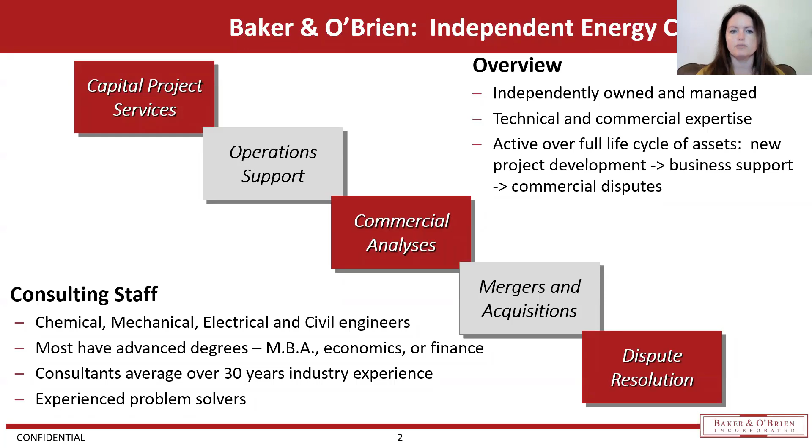So next slide, Luis. As we mentioned, we're going to cover the upstream, midstream, and downstream sector. The upstream sector is exploration and production, so that would be getting the crude oil and natural gas out of the ground. Luis will be covering a lot more on the specifics of that area. Then we'll move to midstream, where we'll cover the transportation, storage, and processing. This would be getting that oil and gas to the next point along the value chain, whether that be a refinery or a processing station, or even a retail center for gasoline and diesel. And then finally, we'll move into the downstream that Tim will cover, where we'll cover refineries as well as petrochemical facilities, so we can kind of end up at that plastic bag according to our title.

So first, a couple of fundamentals. Next slide, Luis. Oil and gas obviously comes from way down deep under the ground. It's made from decomposing organic waste, and this takes 300 or 400 million years to form oil and gas. As that organic waste was buried way under the ground, mud gets on top of it, you get a lot of heat and pressure, it decomposes that organic waste, turns it into oil and gas. And that gets us to present time where you have an oil rig drilling down into the ground, or even maybe sideways into the ground, to start recovering some of that oil and gas. Typically where you find oil and gas, you're also going to find water, so you'll see the three phases there of different materials. Next slide, Luis.

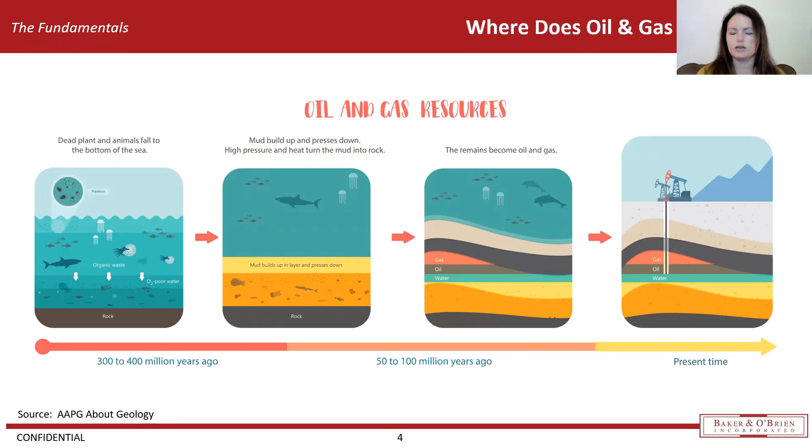A couple things that are important to remember is that not all oil is the same. People think about the oil industry, but the oil itself comes with a variety of different quality components to it. Within oil, you'll have a variety of different compounds such as methane, ethane, propane, and don't worry, we're not going to quiz you on any of those compounds.

Within crude oil, you'll have a variety of densities and viscosities. So that's where you get into the names of light crude versus heavy crude. Every crude oil has some sulfur in it, and that amount of sulfur can give you the name sweet crude or sour crude.

If you think about the US, a lot of what has happened over the last decade has been an increase in the production of light tight oil or shale oil. That type of crude is generally light crude that is sweet, so light sweet crude oil. A lot of what we've heard about up in Canada with the increased production up there is actually a heavy sour crude oil, and that's just how they're termed.

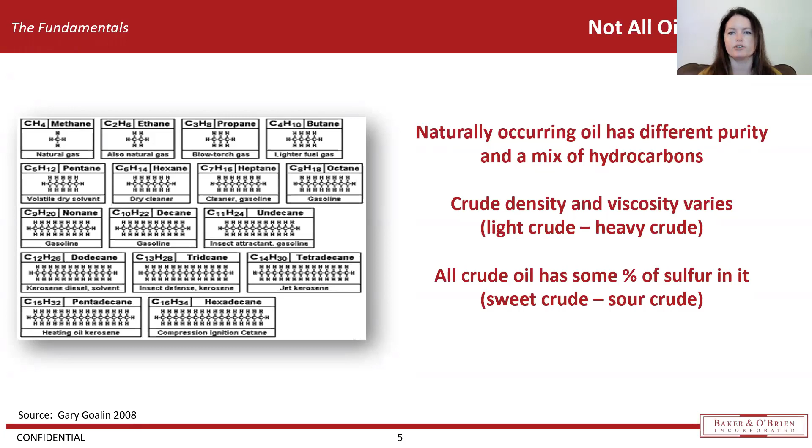The next slide will cover gas. Similar to oil, not all the same. Lean gas would be mostly methane with some ethane, propane, and butanes and heavier. And then rich gas would be again mostly methane, but it'll have a higher component of those NGLs, which are the ethane, propane, butanes, and heavier.

These are just important things to remember as you're learning about oil and gas, so you understand when somebody says, I'm producing light sweet crude oil, it means it's a light crude that is low in sulfur, or I'm producing a rich gas, which means I have a higher component of NGLs within my natural gas stream. Next slide. All right, I'm going to pass it over to Luis.

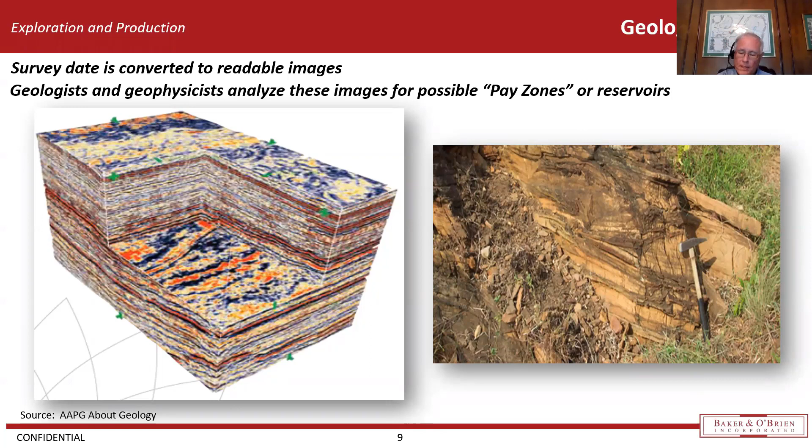Also, you can perform what is called geophysical or seismic surveys. You can do it on land or on the seabed. On land, seismic survey is produced by a human-generated wave that is sent through the earth using a thumper truck. The more energy in the wave, the farther it's going to go before it starts dissipating.

Several things could happen here depending on the properties of the rock. The wave can either pass through, be reflected, or some combination of the two. Then when the wave gets back, it gets collected by devices called geophones. The geophones measure the time since the wave was sent until it got back, and also the strength of that wave coming back.

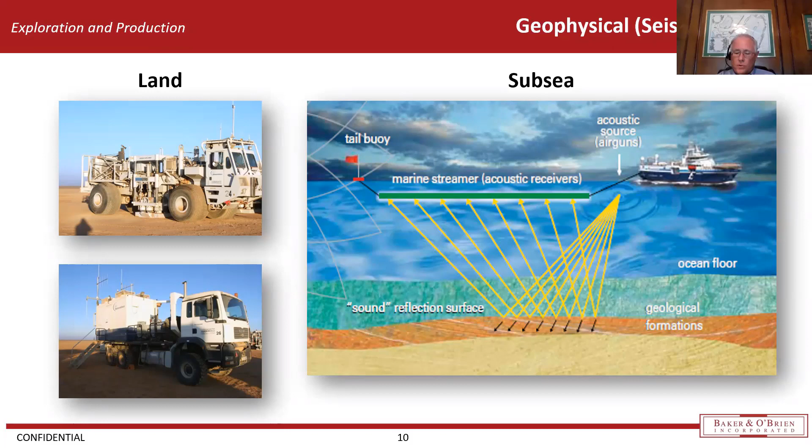The same happens with subsea, with the difference that you use sound waves to map the geological structures under the seabed. These sound waves travel through the water and can penetrate up to 6,000 meters below sea level. When the sound waves come back, they are recorded in devices called hydrophones, as compared to the ones used for land, which are geophones.

Once all this geological surface has been studied and well understood, a decision is made that we are going to test a well, that we are going to drill. But before you do that, you need to have the right permits. In most countries of the world, all mineral resources belong to the government—the rocks, the minerals, and of course the oil and gas.

If somebody, some entity, or corporation would like to extract those resources, they need to get permits from the governments where they found the minerals. In the US is one of the few places in the world where minerals can be owned by individuals or businesses. And if it belongs to the government, you can lease those minerals, those fields, for different ranges of depths and different durations, limitations, etc.

Another thing is the surface rights. Let's assume that somebody goes to your door on your property and says, I will pay you $100 million for the oil that is beneath your property. That would be great, right? However, you do not know how to extract it.

You do not have the capability, you do not have the resources, and it will cost a lot of money. So what you do is sell the rocks and the oil and gas in your property, but reserve your surface rights. Also, you can get compensation for ingressing or egressing the property, for the building of roads, the rights of way, and if there is damage to your property, you get compensated. So if you would like to sell it, you sell it, but you remain possession or maintain possession and control of the surface.

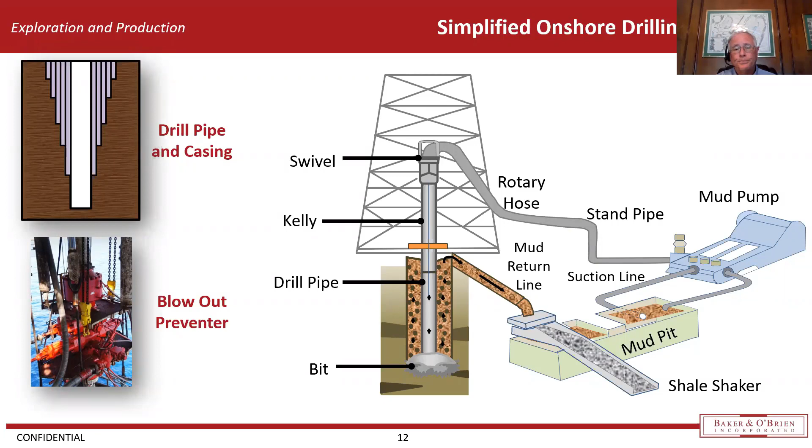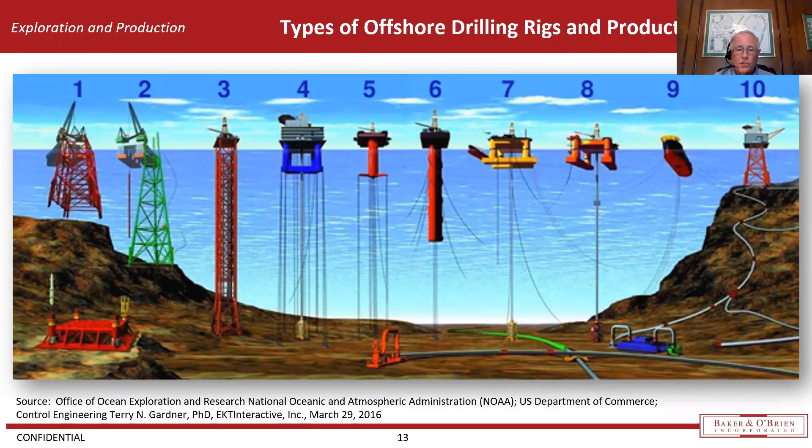Some people decided to go even deeper, up to 20,000 feet, and that's where you get the semi-subs, numbers 7 and 8. You also have the famous floating production, storage, and offloading tankers, number 9, which float, produce, store, and then move the oil back to the tankers. So a lot of good technical development in here.

So once the drilling continues, you have to make sure that whatever assumptions were made during the surveys are proved. That's what is called logging and testing.

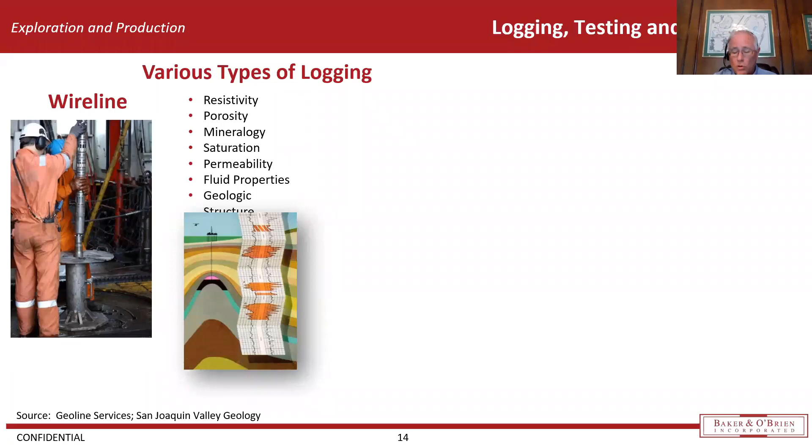Well logging is the practice of making a detailed record of the well. You throw a wire line through the drilling pipe with a lot of instruments and sensors, and you capture the resistivity, porosity, what the minerals are, the saturation, etc., in order to decide if you're going to continue drilling and if you're going to spend a lot of money putting together a production facility on top of that well.

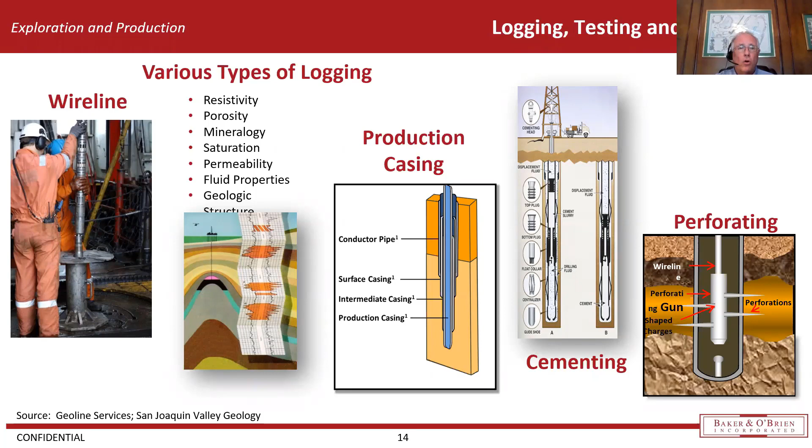That leads to well completion. I talked a little bit about production casing and cementing earlier, but then the last step is perforating, where you actually perforate the casing and the cement in order to allow the oil and gas to enter into the well stream.

The last step before production begins is the installation of the Christmas tree, that's what the industry calls it. It's a piece of equipment that provides basically flow control on an oil and gas well. When the oil has been decided to move into production, the BOP is removed and they place the Christmas tree. It's basically a vertical assembly of valves, with gauges, chokes, and it also allows you to inject chemicals while producing or extracting the oil.

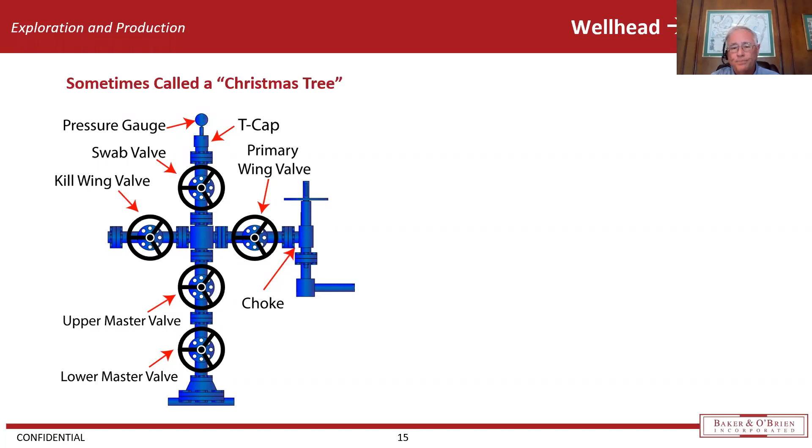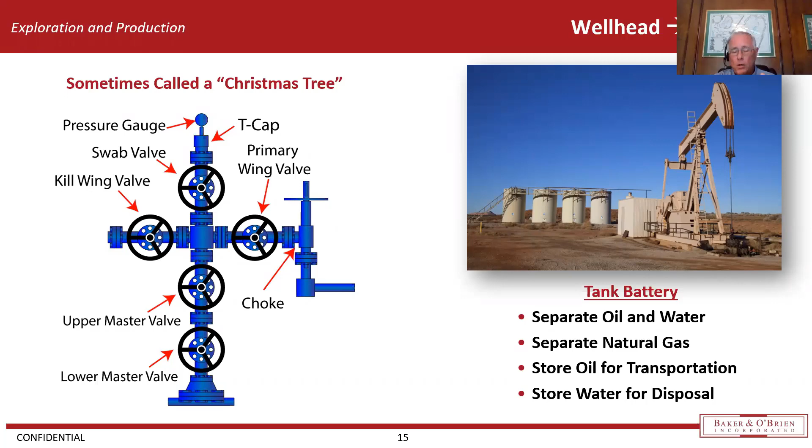When it comes to production, it looks like a very simple process, but itself is complicated. Basically what you do is separate the oil from the water and the gas. Each one will have its own stream, and then you either store the oil or transport it, and you do the same with the gas. You either compress the gas to send and transport it, and you either treat the water before disposal or store it and move it somewhere else.

This is an example of a production facility. In this case, once several wells have been decided to be exploited, what you see here is a typical shallow water production platform. On the left corner, the farthest to the left, is the drilling rig, which has several wells in it. The oil is then pumped back into the production platform, which is the one in the middle.

And then you have two other platforms which basically compress the gas that has been separated from the previous one, and it's transported through pipelines. You will also see on the top right side a living quarters platform, because people live in those platforms, in those facilities. So they need to have rooms and dining rooms and things to rest and distract themselves.

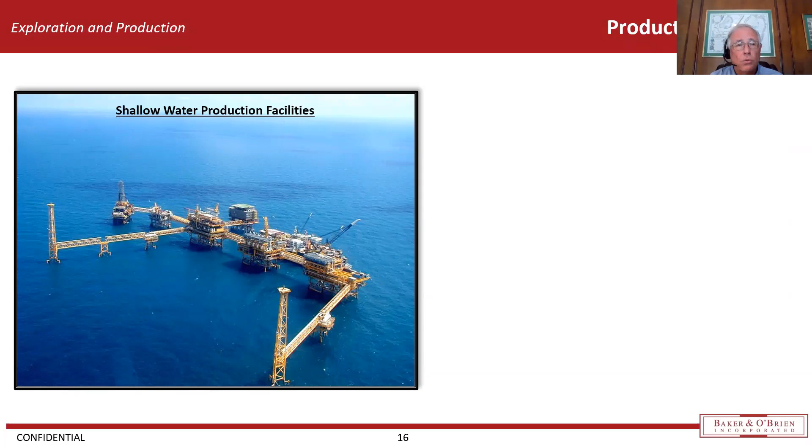In case of emergency, you will see those towers on the left. Those are flare towers. So what you do is, if you need to relieve the pressure, you open the valve and you just start flaring the gas.

On the other side of the spectrum, you have a subsea production system. This is in water depths of 8,000, 20,000 feet, as I was showing before. And you can see a subsea production system with an FPSO, which is connected to subsea wells. And then the oil and the gas flows back to the FPSO through what is called the flow lines.

The amazing thing with these types of facilities is that everything is performed remotely. Everything is controlled remotely. So all the power, the heat, the controls are through cables that are called umbilicals, and then it produces the oil, and then it goes back to the tanker.

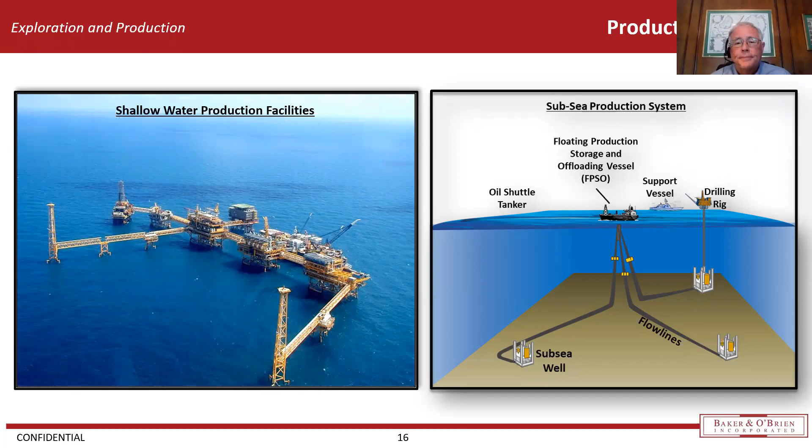Okay, thank you, Luis. So with this section, we're going to start the midstream. So now we have oil and gas coming up out of the surface to the wellhead. From here, we need to get that material to its next point in the value chain. So we're going to go through the midstream.

Next slide. So this slide takes you from the wellhead to the ultimate user on the right, which would be in green in the downstream sector. We're going to start on the left, and I'll just walk through the value chain, and then we'll get into a little bit more of the specifics of each of these types of assets in the next couple slides.

So starting on the left at the wellhead, first we'll start with natural gas. So whether you're producing crude oil or natural gas, you're going to have some assets that are very similar, like we're going to use pipelines, but the materials used to make those pipelines, the amount of pressure that they need to hold, and the facilities required after that can change. So let's start with natural gas.

With natural gas, since it is, as the name says, a gas, it has to be compressed and held within a pipeline. And so everything along the value chain is held very tightly. It can't be put onto, for example, a truck unless it's a specialized truck. It can't be put onto a tanker unless it's a specialized tanker. So you need to have all sorts of pressurized materials used in the transport of the natural gas.

From natural gas pipelines, you would go to a gas processing facility as one of your first steps. So the natural gas that comes out of the ground, a lot of times it has the natural gas component, and then it has natural gas liquids. It also comes with water and some other kind of unsavory actors that might be mixed in with the stream. So you go to that first step and you separate it out.

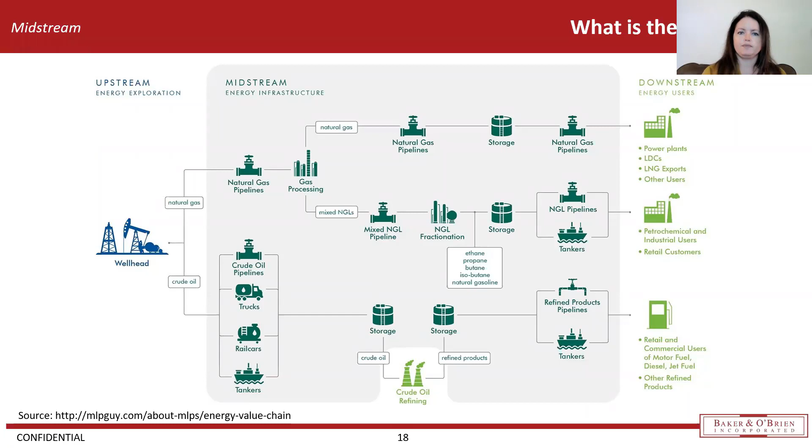Let's start with natural gas. I'll tell you a little bit more about each of those facilities we just quickly covered. Starting with pipelines, this would be the most common way to transport natural gas. Since it's a gas phase, you're actually going to start at the wellhead with a very small diameter pipeline. It'll go to a larger diameter pipeline as it gets into transmission, so you've picked up natural gas from a lot of different wellheads, brought it to a larger pipeline, and now you're going to put all that gas together and ship it to the next facility.

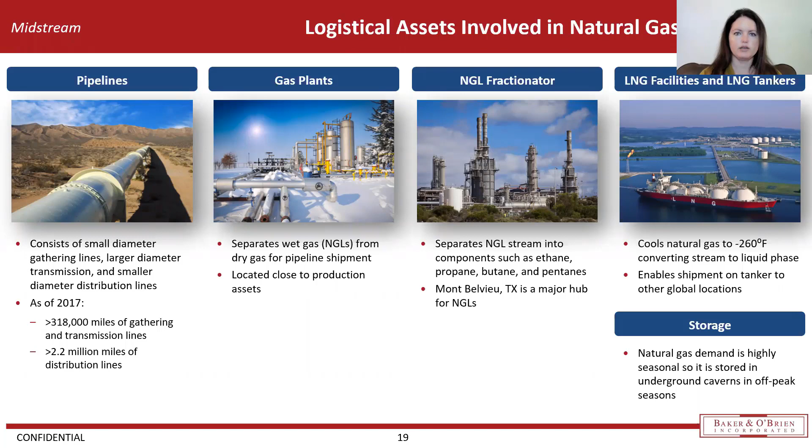All right, next slide. This one is very similar to the previous one, but it's on crude oil instead. So again, we'll start with pipelines. Again, that rare above ground pipeline that we're seeing in the picture here. Crude oil pipelines are also typically buried, so you would not see them just kind of hanging out anywhere. You'll have a similar structure where you have small diameter gathering lines that go to a large trunk line, and then they'll go to smaller lines as they connect off to refineries. In 2017, there were 79,000 miles of crude oil pipelines and 62,000 miles of product pipeline, quite a bit less than what we saw on the natural gas side.

And that's just because crude oil can be transported in a variety of different ways. It doesn't have to necessarily go into a pipeline. So it gives you a little bit of variety on that. And then it doesn't have the pressurized components that you need for natural gas.

Tankers and barges are used in crude oil and petroleum product transportation. This would either facilitate imports of crude oil or maybe exports of crude oil into and out of the US, since we're kind of focusing here. It would also facilitate movements of intermediate feedstocks. So like, let's say you've taken crude oil into a refinery and you've made something that's not quite finished. Another facility might need that stream. And so you can put it onto a barge or under a tanker and you can ship it off to another facility for further processing.

And then let's say you created diesel or gasoline and it's not necessarily needed where you produced it. So you ship it off to somewhere else where they do need it. So you use a lot of tankers and barges.

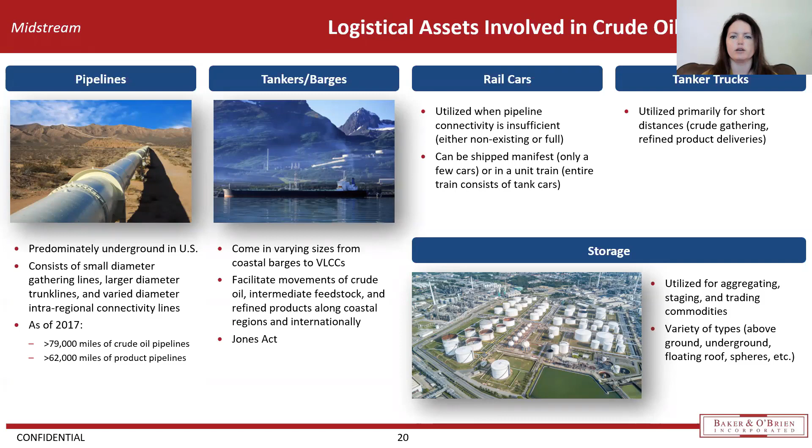And then storage, big storage facilities. Now these a lot of times are above ground. There is some crude oil underground storage over in Louisiana and some other parts of the US. And then there's also a little bit of refined product underground storage. For the most part, you'll see above ground tanks. So these big white tanks that you see in the picture, you'll probably see them all around your different cities. They facilitate the storage of all the variety of different products that you might get out of a refinery, and they store crude oil.

All right, next slide. So I'm going to walk quickly through a map.

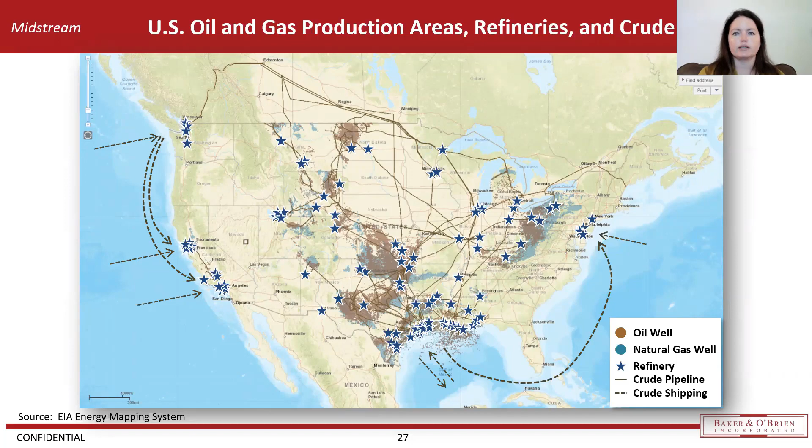That made the news earlier this year whenever there was a hack into their system and Colonial Pipeline shut down for over a week. You saw fuel shortages show up along the East Coast, because between the Mississippi, Alabama area all the way up to New York, there are no refineries in that area. So that entire region depends on Colonial and Plantation pipelines. You started seeing fuel shortages show up in Atlanta, Raleigh, and Charlotte. So those product pipelines are extremely important for deliveries of fuels to everyone.

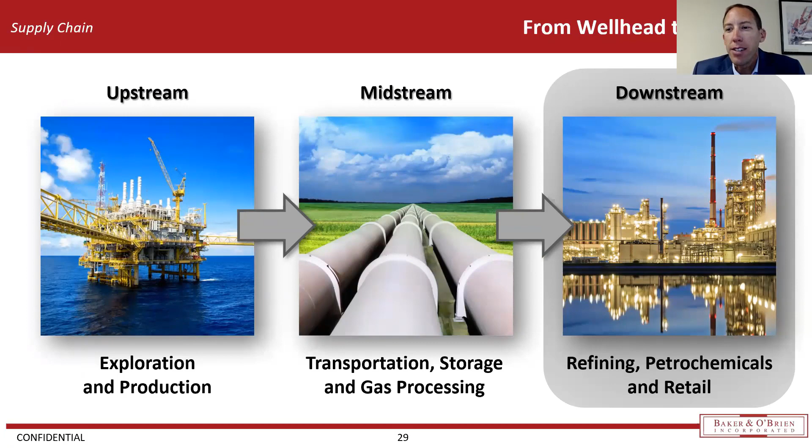So refineries and petrochemical facilities are alike in some ways and different in others, with the obvious difference being the feedstocks and products. Oil is the main input to a refinery, and most of its products, gasoline, jet fuel, and diesel, are consumed for their energy content. Petrochemicals is a more precise operation, and lighter hydrocarbons are used to produce petchem products where subtle differences in performance and characteristics require very high purity and exacting specifications for the products.

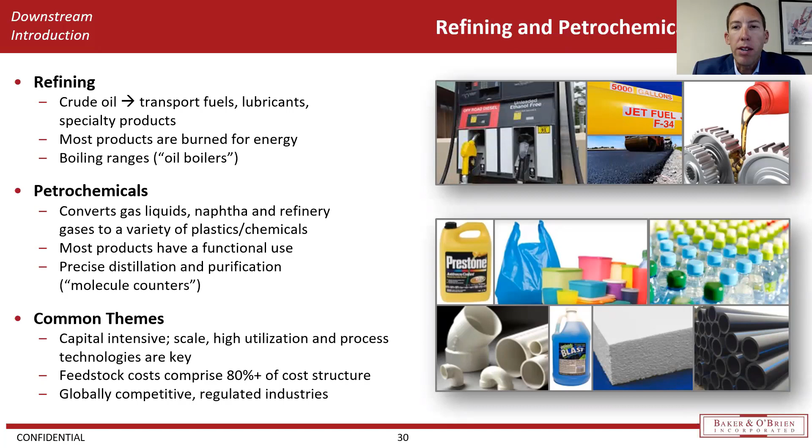Common themes between the both include high capital intensity. Both require very large upfront investments, very high feedstock costs relative to the percentage of operating costs, and both compete for global markets and are highly regulated.

As Luis has already alluded to, each marketed crude oil has unique properties. The two most common properties are gravity, API gravity, and sulfur. API is another term for the specific gravity or density of the material, and sulfur is another critical property for processing the crude oil. Increased sulfur levels means higher processing costs to remove the contaminant. From a commercial perspective, knowing both a crude oil's API and sulfur already tells a lot about its potential market value. The chart at the right depicts various crude oil grades with sulfur content on the bottom axis, API gravity on the vertical axis, and the size of the bubble indicates the relative production volumes.

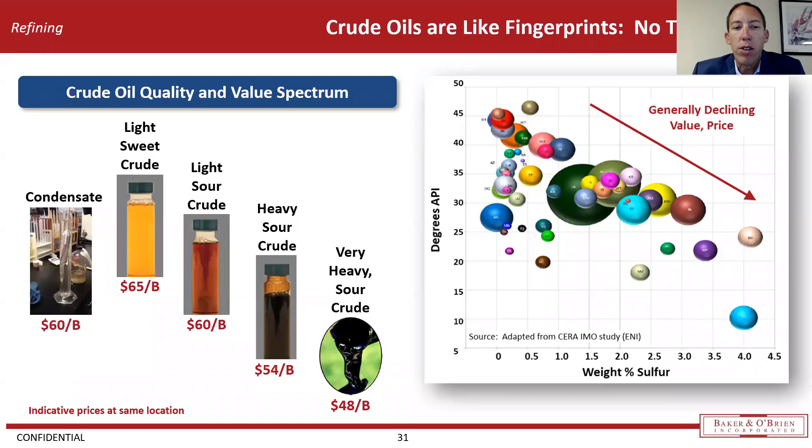As noted, the value of the crude oil to refiners, and hence its market price, generally declines with higher sulfur and lower gravity. The depiction on the left presents a more visual hierarchy for the value of crude oils. Although current market prices are a bit higher than shown on this slide, it nonetheless shows the relative value, with generally lighter oils or higher gravity API being easier to process and more valuable. The one exception is that at some point, very light condensates actually decline in value per barrel due to the presence of less valuable lighter hydrocarbons.

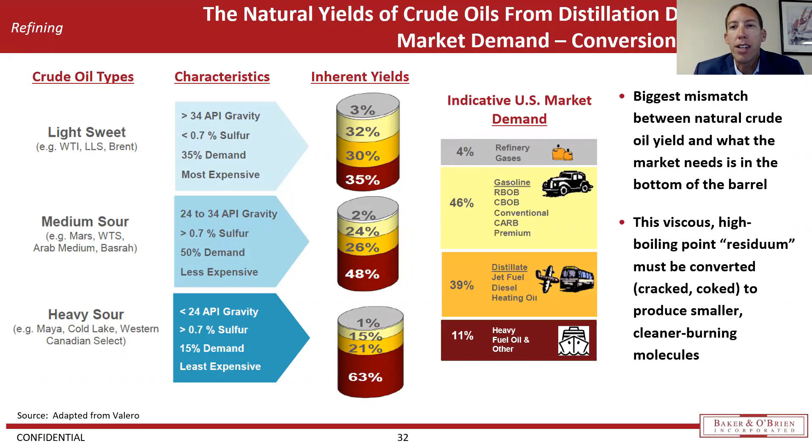Right away, you can see that there are fairly large mismatches depending on the type of crude oil. The biggest mismatch is at the heavy end of the barrel, the dark maroon section on the bottom, where most crude oil contains more heavy viscous oil than the market requires. At the same time, there's not enough gasoline and diesel, shown by the lighter yellow and orange sectors. In other words, some type of conversion is required to convert the heavy molecules into lighter, cleaner transportation fuels.

All right, so how is that done? In a very simplified sense, refining can be broken down into three types of steps.

The first step is a distillation step, similar to what we just discussed, where the crude oil is heated and distilled into separate boiling fractions, or cuts, as they're commonly referred to. At this step, only heat is used. There's no catalyst or hydrogen or even very high pressures at this stage. In most refineries, this distillation occurs in two different columns: one operating at close to atmospheric pressure, and the second, usually a shorter, fatter tower, operating under vacuum to keep temperatures below a certain point that would lead to excess fouling.

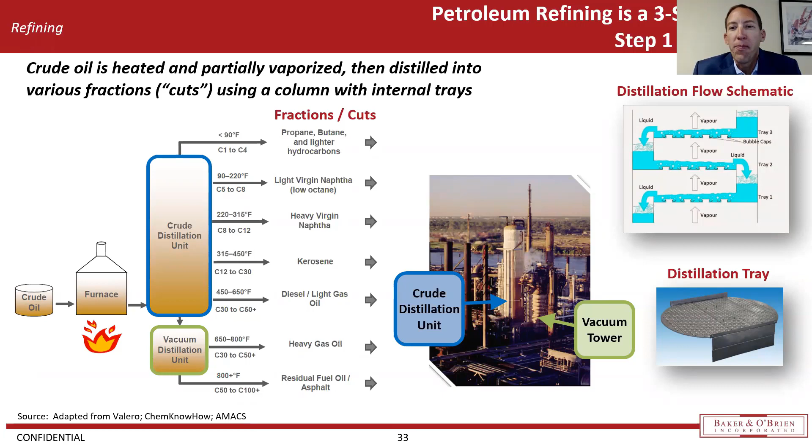Next, the second step involves taking the intermediate streams and treating and processing them in conversion units. These conversion units typically include reactors, and they use higher temperatures, higher pressures, catalysts, and hydrogen. Step two is where most of the heavy work is done in the refinery in terms of breaking molecules, rearranging them, and removing impurities.

The result of step two is a number of different components that are able to be blended into finished products. And here we come to the final step. Step three is where these components are blended into saleable products using different recipes. For example, the gasoline you see at the pump is often a result of blending anywhere from 6 to 8 different components to achieve a certain octane specification or other key properties to deliver a finished product you're familiar with at the pump.

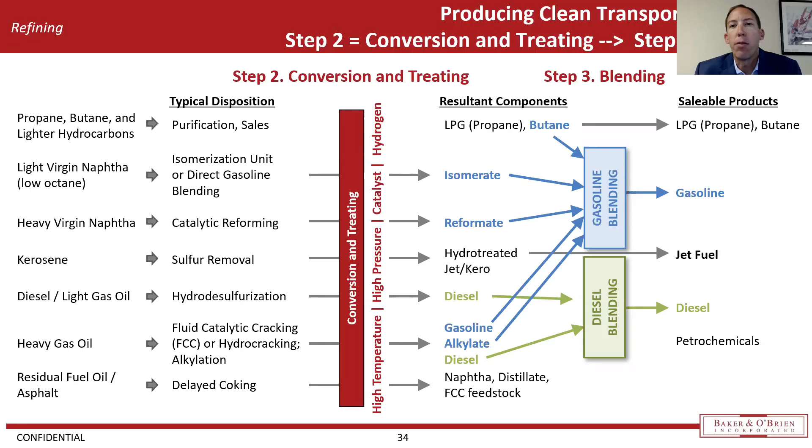Refineries overall, we've all seen them, we've driven by them. At night they can be quite pretty, almost resembling mini cities. Sometimes during the day, not so much, but they require lots of land. They're very large facilities, oftentimes employing hundreds to sometimes thousands of personnel, depending on the size of the facility.

They're continuous operations, 24/7. The oil is always flowing and operators are controlling the processes. There's a high degree of automation within the process, but it always requires plenty of human monitoring and sometimes intervention to keep the process on track. Again, most of the process is invisible. It's not like you can watch widgets on a production line. Nearly everything is contained safely within pipes and vessels and continuously flows through the equipment.

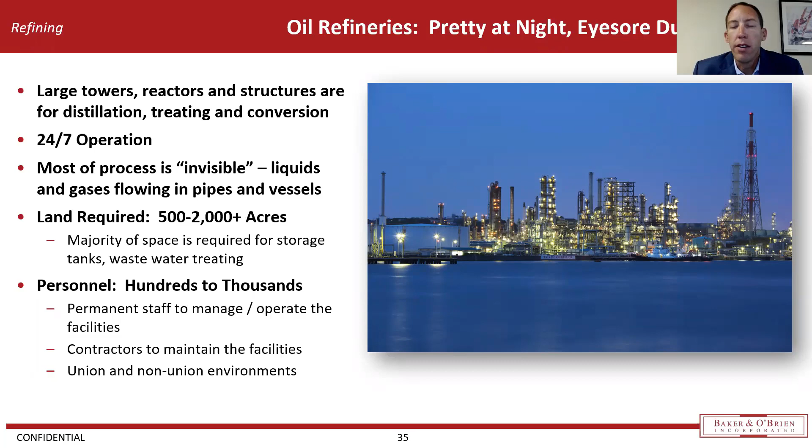All right, so the last step is getting fuels to the consumer, and this requires transporting from the refinery to the fuel pump. As Amy touched on, this is first done typically with large or bulk transfers using pipelines and water vessels to distribute products close to end market terminals.

From there at these terminal tanks, the last leg is the transport by truck to underground storage tanks at the retail site. The fuel brand you see at the pump denotes the refining company that stands behind the fuel, but sometimes it doesn't always indicate who actually owns the pump and store. A lot of times there are relationships between third-party resellers and owners of the site and the fuel suppliers and refining companies supplying the fuels.

This takes us to the end of the supply chain for refining, in the case of gasoline, for example, delivered to your fuel tank at the retail station. So next we'll move on to petrochemicals.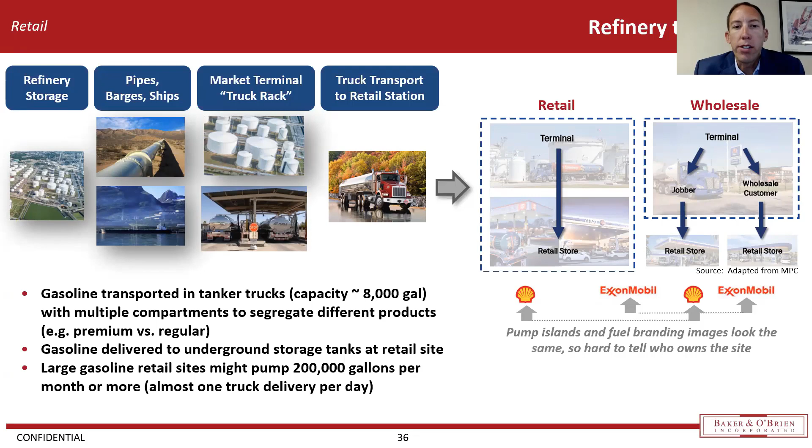Let's talk petrochemicals, starting with a focus on ethylene plants. These are commonly called olefin plants or crackers. Ethylene plants generally process the lighter molecules - ethane, propane, and light petroleum naphthas - and transform them into chemical building blocks. Crackers are so named because they crack or convert feedstocks into olefins and aromatics, which are the building blocks for other chemicals. This is done in a two-step process: it usually uses furnaces and high temperatures to crack the molecules, followed by rapid cooling or quenching. The second step involves compression of the resultant gases, followed by separation into high purity products, such as ethylene, propylene, butadiene, and other chemicals. Most of these plants are concentrated on the US Gulf Coast, where they have access to the feedstocks and refineries.

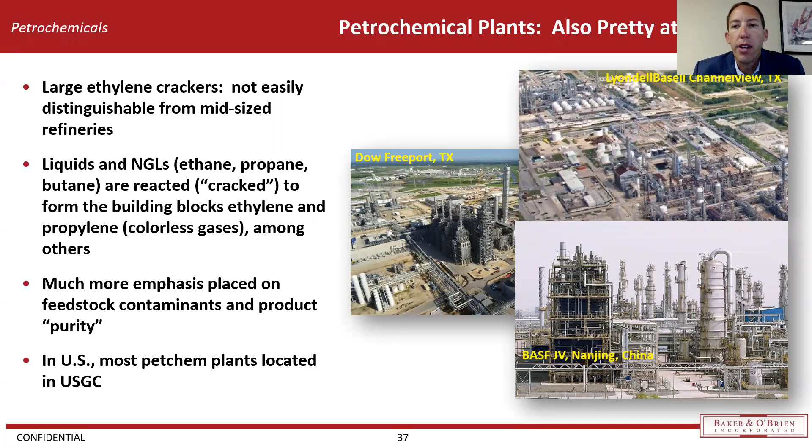At this stage of the value chain, we're focusing on ethylene and propylene, two of the chemical building blocks that form the basis for most of the plastics manufactured around the world. Ethylene and propylene are colorless, odorless gases, somewhat similar to ethane and propane. They're very expensive to ship because they require high pressure or cryogenic storage requirements. Therefore, most petchem companies also produce plastic resins and pellets, which can be easily stored and shipped.

So what happens is ethylene and propylene are converted into plastic products in two discrete steps. First, the petchem company uses a gas phase reaction along with a catalyst to combine these light molecules into longer chain polymers. Then they melt and extrude the polymer to make plastic pellets. At this stage, the products are polyethylene and polypropylene, and they look very similar with similar molecular structures.

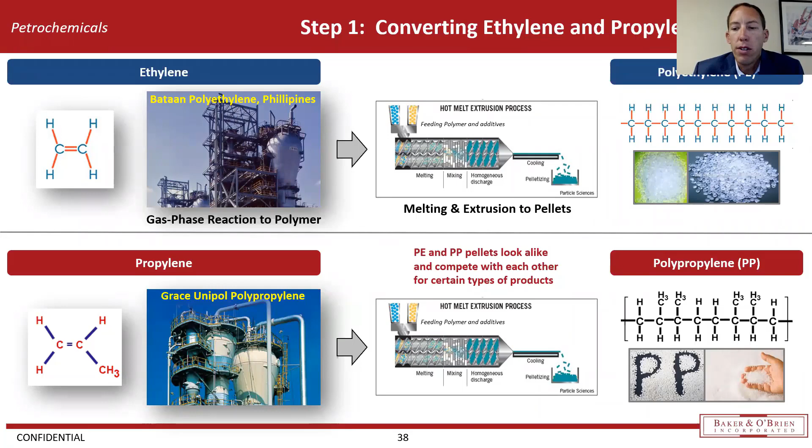The last step is to convert these plastic pellets into the usual products we're all familiar with. This is typically done by separate companies, referred to as converters, who take the plastic pellets, melt them, and convert them into finished products, typically at different locations. These pellets are stored in bags and shipped via truck, rail, or ship to the converters. A lot of these companies are not household names, but the finished products become what we're all familiar with.

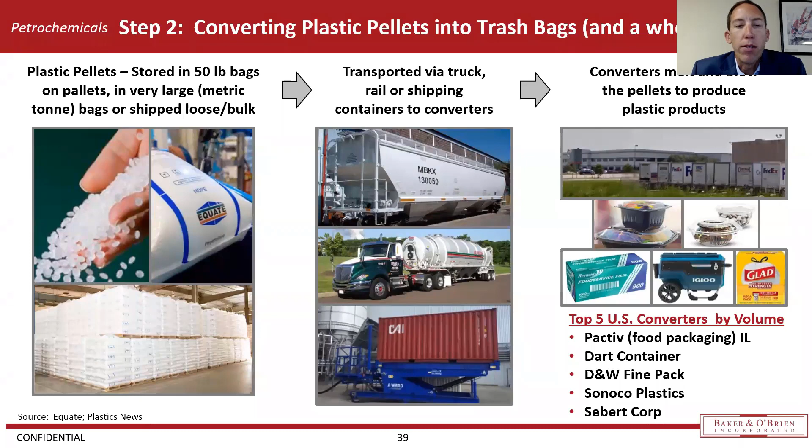Lastly, we're showing some different classes of polymers: three classes of polyethylene on the left and polypropylene on the far right. You may recognize the recycle symbols near the top. These chemicals go into a wide range of plastic products, and it all depends on the criteria or properties needed for the plastics—do they need to be flexible or rigid, thick or thin, how strong—and that determines which chemicals are used and how they're made.

There's some overlap and competition between the products, for example between polypropylene and polyethylene. So here we conclude the value chain, arriving at the plastic bag again and a whole host of other products, having been produced from ethylene, which was produced by crackers using feedstocks from gas plants and refineries. At this time, I'll turn the presentation back over.

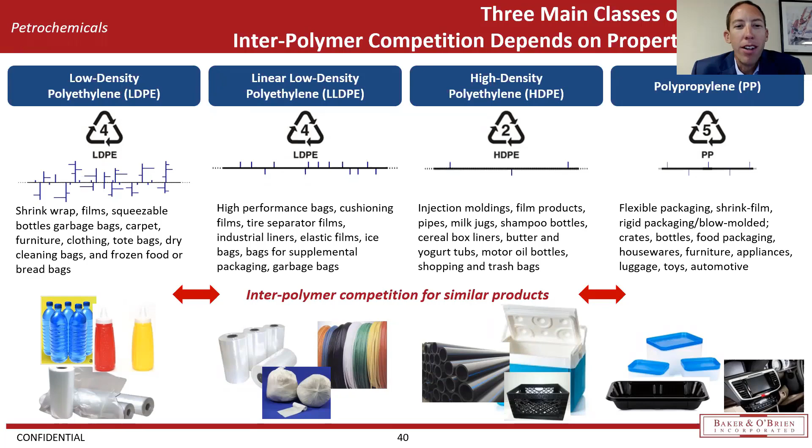Okay, so I'm just going to go through some fun facts or maybe industry lore, just fun things that you can tell other people if you're ever wanting to talk about the oil and gas industry.

Let's start with the first one, the green triangle on the left. The basis for the word petroleum is from the Latin—go ahead, Luis—which is petra for rock and oleum for oil. So petroleum, as we talked about at the very beginning in our fundamentals, oil and gas is typically found way underground, underneath rocks, and it's long decaying organic matter.

So there you go, petroleum. The next one is Vaseline, which is actually a petroleum product. Go ahead, Luis—Vaseline or petroleum jelly was invented a long time ago to help treat cuts and bruises. One of the more disgusting qualities of it is at one point it was actually used in place of lard or butter by some bakers. I'm just surprised we were eating petroleum at one point.

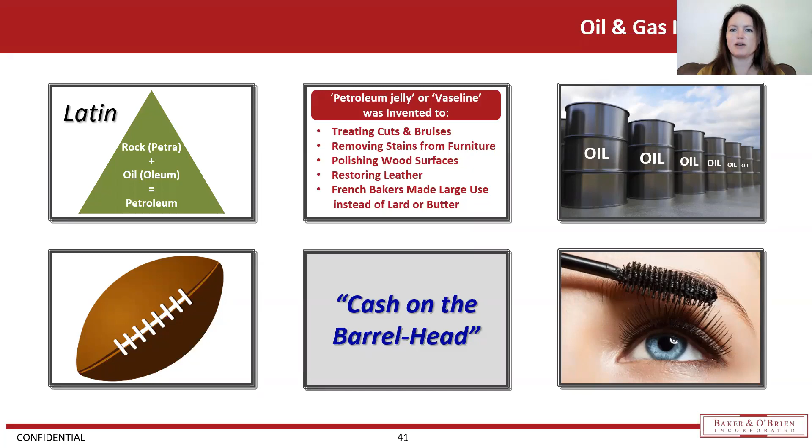That's Vaseline. The next one talks about why we use a barrel of oil. A barrel is 42 gallons, which is a very odd quantity. Officially, the industry adopted the barrel sizing back in 1872 at the Petroleum Producers Association—they said it was going to be officially 42 gallons. There's a quote out there that says it's about 300 pounds, or as much as a man could wrestle. There are also some other ideas on why it became officially 42 gallons.

Back in the 1800s, when we first started producing oil in the US in larger quantities, we were storing the oil in all sorts of different containers—small containers, whiskey barrels, things like that. Whiskey barrels had generally become the size of about 40 gallons, so they would say, let's put it in a 40-gallon container and we'll give you 2 gallons extra as a gift to you, potentially for loss or something like that. So anyway, I don't know that there's exactly a true statement on why it's precisely 42 gallons, but a lot of it seems to have to do with the whiskey industry.

The next one is the football shown at the bottom left. That's just because one of the most popular awards out there, the Heisman Trophy, was named after a Cooper's son in Titusville in 1880—Titusville being the location of one of the first major oil-producing wells here in the US. So yes, it was named after him.

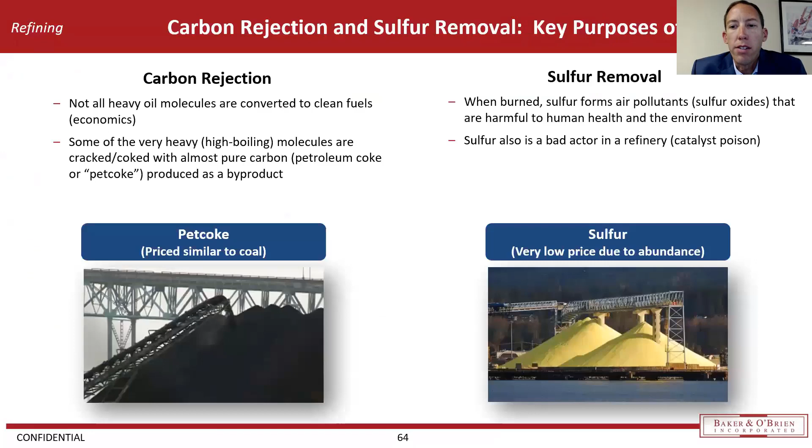All right, Luis, can you talk about the difference between conventional and unconventional oil? Yeah, sure. Well, it depends where the oil is. If it's easily accessible, like between the layers of the stratum I just mentioned, and you just drill vertically with the mud drilling technique, that's basically called conventional. So it's not that the oil itself is conventional or unconventional, it's the way you extract it. It's conventional oil if you use conventional methods like mud drilling. If you have to drill horizontally because the oil is trapped between layers that have no porosity or zero permeability, then you have to frack those rocks and drill horizontally - that becomes unconventional oil. The oil is the same, it's just the way you extract it.